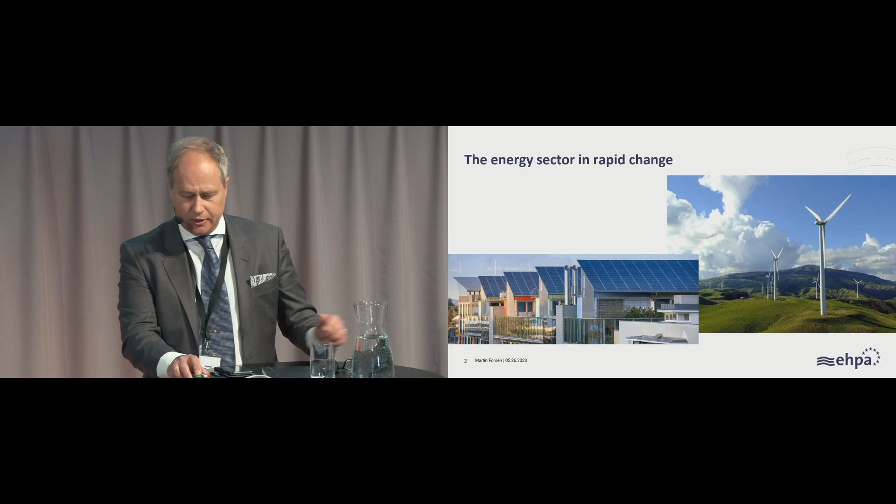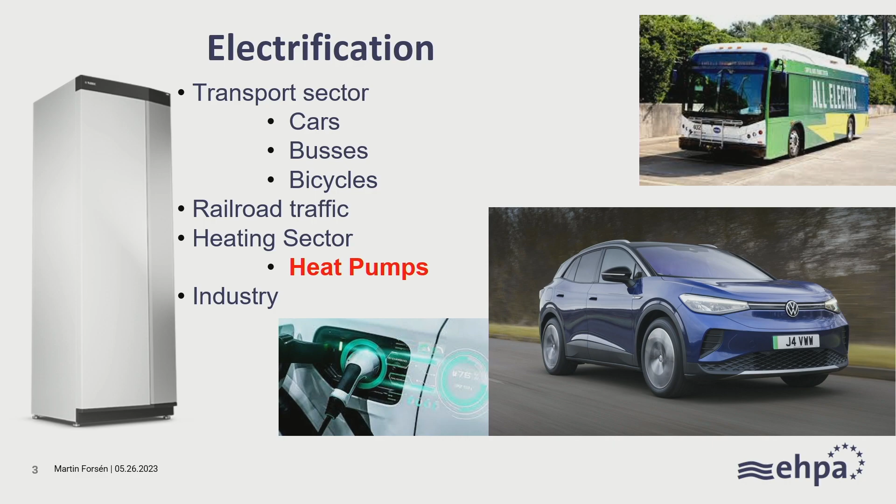And if we look specifically at what is at the center point here, it is electrification. What I believe is one of the greatest challenges for the future is to tackle large-scale industrial combustion, wherever it might be, because there is a problematic issue. First, we need to find a sustainable fuel to burn. There are lots of issues around that. Then we need to harvest that fuel somehow. We have to transport it, refine it, and then burn it, and it creates emissions. And then we have to take care of the ashes. There are great challenges all over that value chain.

But the way out of this is to electrify as much as possible. And we see this electrification has started. It's happening in all sectors - you know it in the transport sector, the increase in sales of electric vehicles, cars, buses, bicycles, you name it, railroad traffic, and in the heating sector.

That is central. And I told my colleague last night at dinner, I was almost crying when I saw the energy system integration strategy when it came out, where for the very first time it was highlighted the importance to electrify the heating sector. And that really paved the way for the upcoming new proposals for new directives and regulations. That was really key for us.

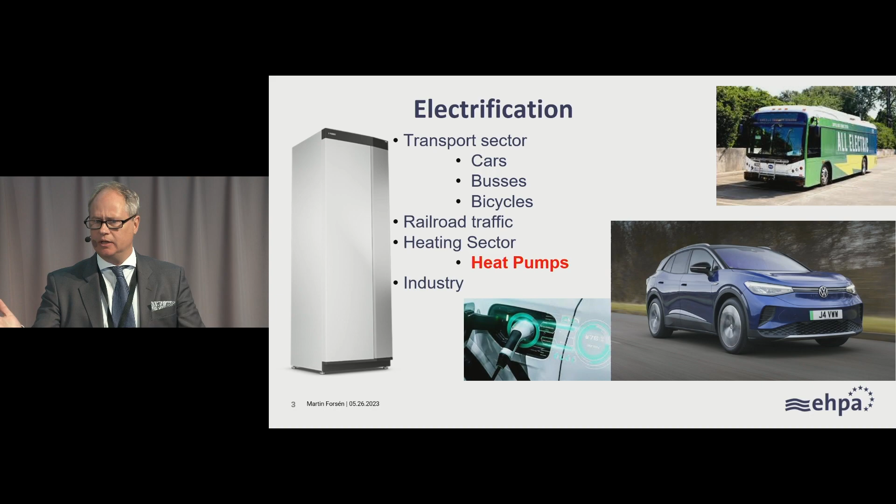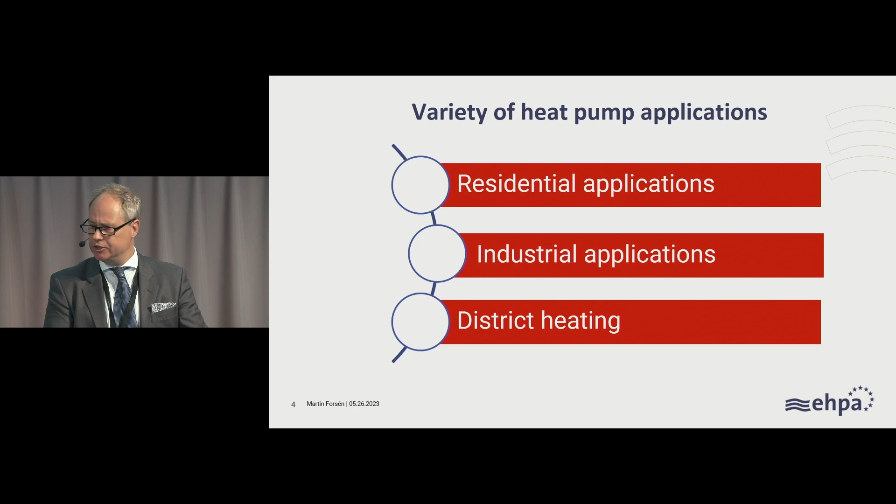Now we're on track. But why then, and where are we using heat pumps? Well, we're using heat pumps in all different types of applications. Today, we will mainly focus on residential applications. However, we also see heat pumps coming up, slowly but steadily, in industrial applications, and we believe it has a great place to fit into the coming generations of district heating as well.

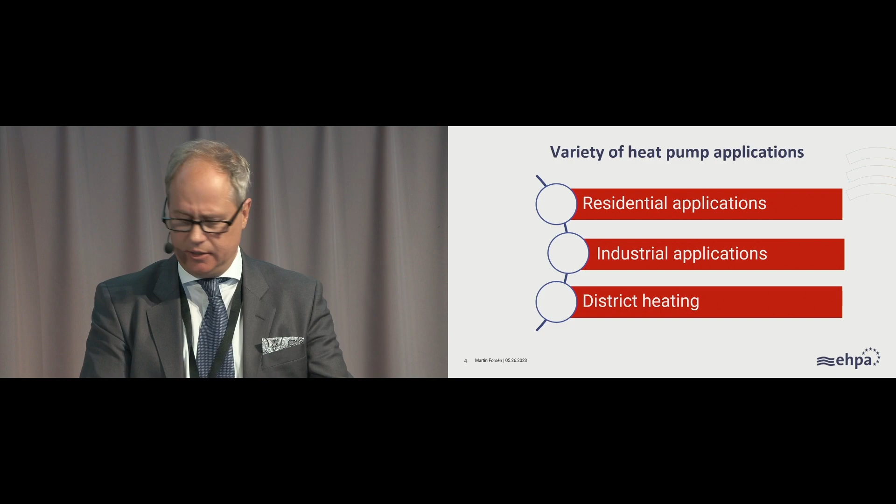But not only that, we have heat pumps all over society. I sometimes talk about the heat pumpification of society. We have hidden heat pumps in all our appliances to meet the demand for improved energy efficiency. New appliances like laundry dryers have a heat pump integrated. We see them coming in dishwashers. And pretty much every new electric car has a heat pump included in it.

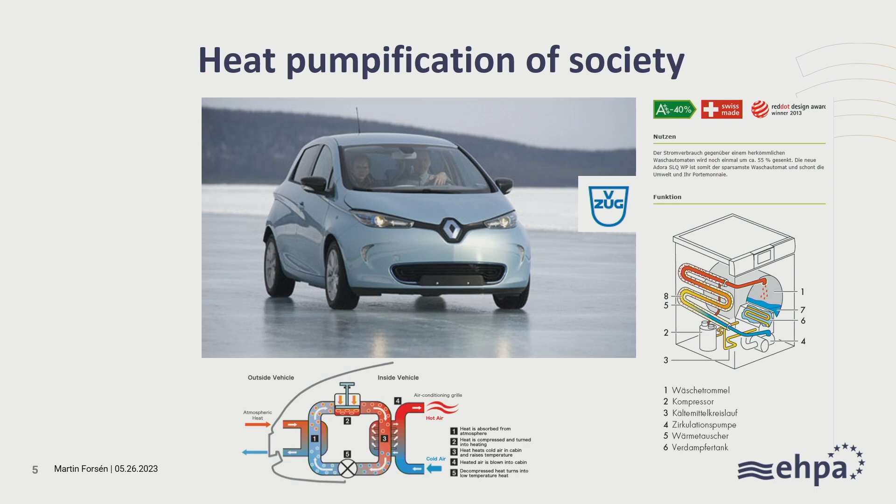I believe if it's not already the case, it will be very soon that the number of heat pumps installed as a component in another appliance or a vehicle will surpass the number of heat pumps being installed in buildings.

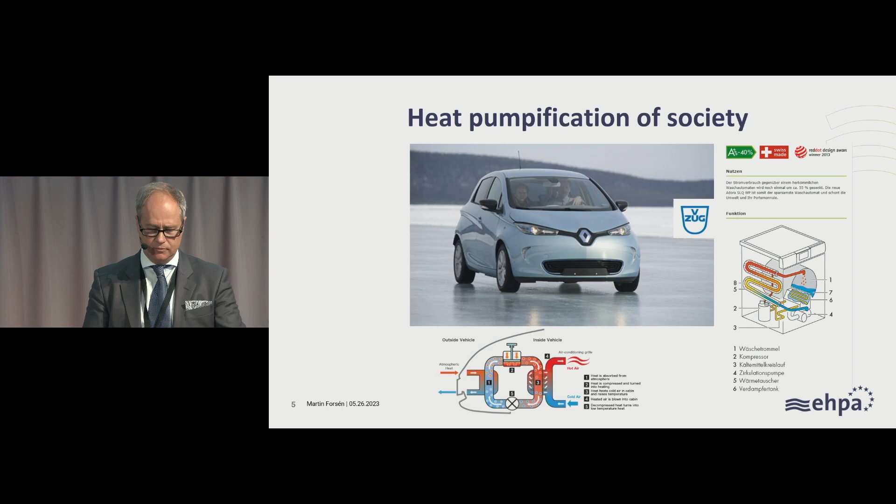So why are heat pumps so important for the future? Well, heat pumps stand for energy efficiency. It's one of the most efficient technologies that we have. It stands for emission reductions and also contributes to the increased use of renewable energy. We can also, in one and the same appliance, provide both heating and cooling. So that's really the backbone of what the technology stands for.

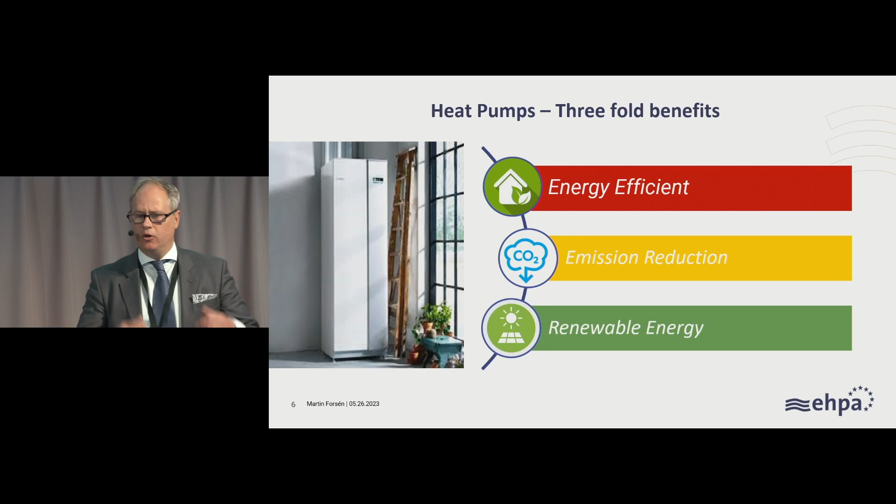And that has paved the way for the tremendous implementation rate that we've seen in Sweden for decades. So this slide shows the sales development of residential heat pumps in Sweden.

It all started around or just before the millennium, and ever since then, it has increased dramatically. We are now a mature market.

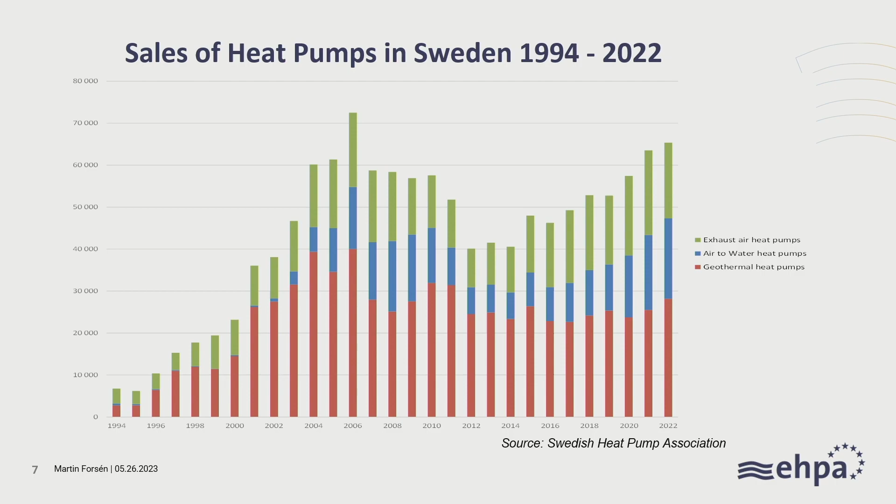This is the self-evident choice for people living in single-family houses, and it is growing interest also for multi-family buildings. It's growing interest in industries as well.

What you see here, we have also seen an increase in the last few years. That is not because the ones lagging behind are now introducing, going into this technology. There's some, but that's not the major part. Now, as we've had this steady market for so many years, we've entered into the replacement market of the old heat pumps as well. And that's why we see this increase in sales the last couple of years.

So it has been said earlier that now in Sweden, looking at the single-family houses, more than 60% of them have a heat pump installed and in use.

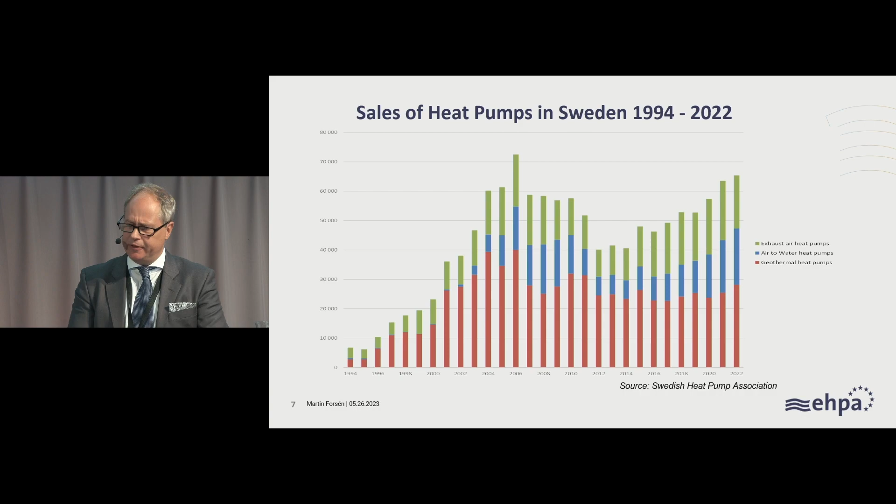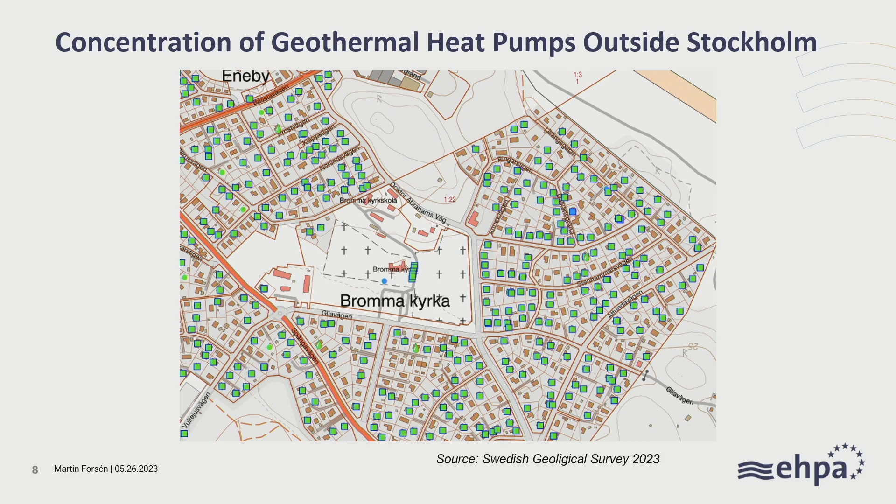So looking at this penetration, I've taken a picture from a suburb just outside of Stockholm, looking at an area here in Bromma, where we have a great number of ground source heat pumps installed. And it's not only in Bromma, that's not very specific. It's all over the big cities. We have these systems installed.

So what you see here is a map of this small area. The brownish figures here are the houses, and the green dots here are indicating which house has a ground source heat pump. So it's a tremendous, unsurpassed concentration of this very high efficient technology.

And those houses that do not have a ground source heat pump, the great majority of them are using another type of heat pump. There are hardly any oil boilers left.

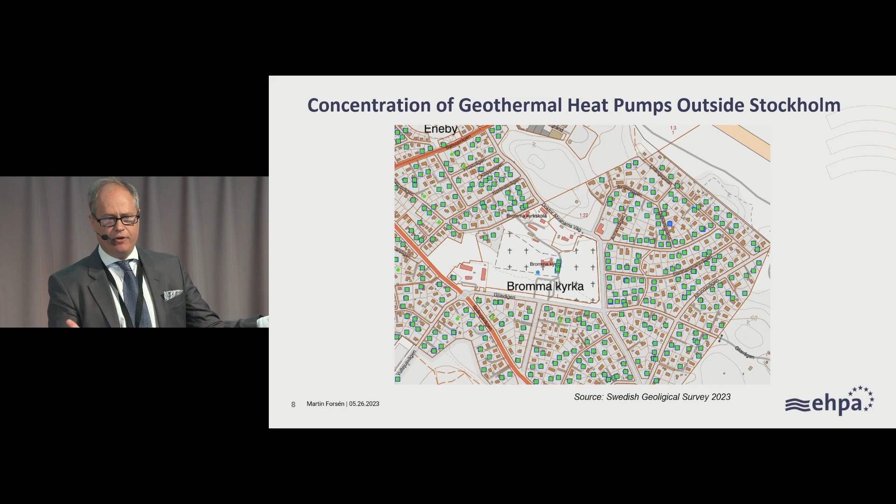So now we can answer a lot of these questions that all the other member states are raising. Does it really work? Does it really deliver? Do we live up to the promise? Now we can look at the results in facts and figures.

So looking specifically at the use of heating oil for heating purposes, as was said before by Eva, in the 70s, almost all houses were using heating oil. They had a boiler in their house. I had one myself. But that has completely changed now.

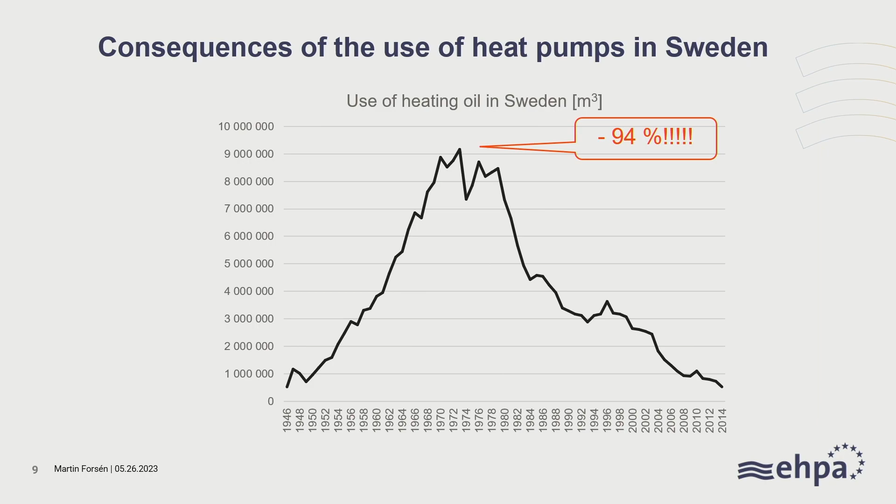There are hardly any oil boilers left. There are in the range of 10 to 20,000 left, and we know that many of those are not in use, but they're still remaining in the house. We're now down at levels right after the Second World War. So we believe that we've done that job.

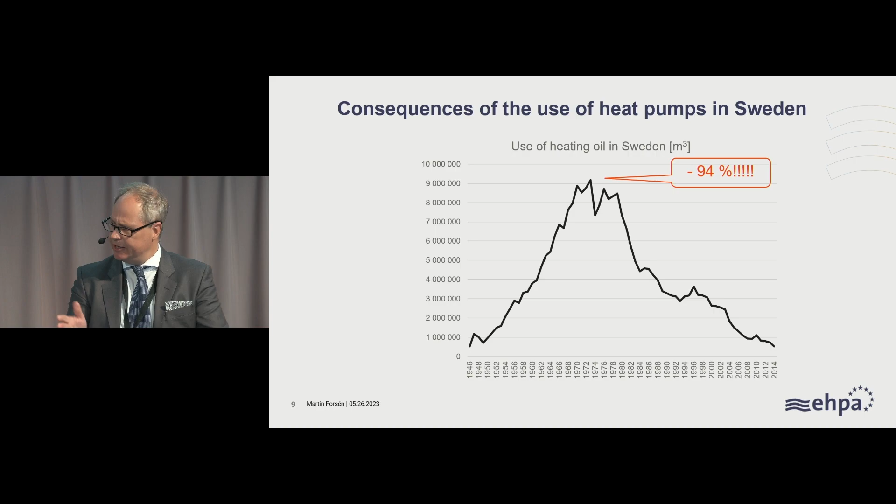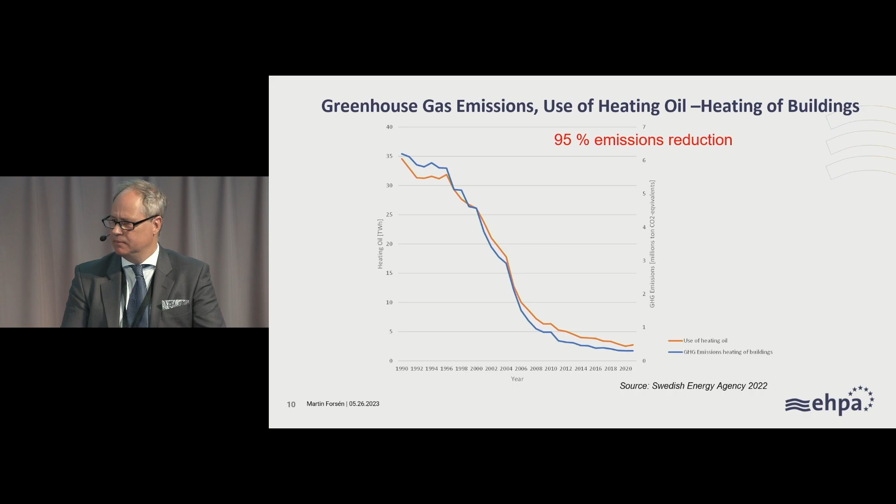We're past that. And what has come out of that, if we look at the emissions reductions from individual heating in buildings, it has been reduced now by 95%. So it really does deliver.

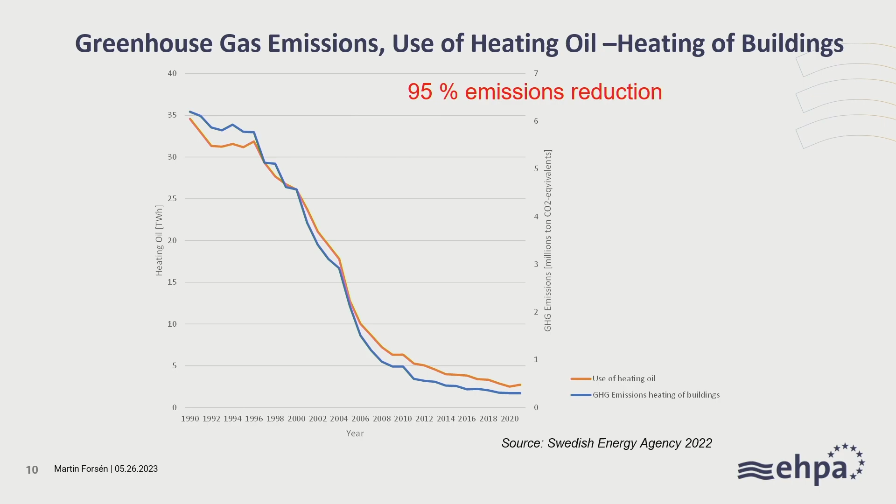But not only that, because we've had a surplus and a very strong electricity grid in Sweden, we've had in the past quite a lot of electricity heating. Not only direct electricity, but also electric boilers. So we did not only just shift out all the oil boilers, we have also replaced a lot of electric boilers, and we have complemented direct electricity heating by adding an additional heat pump in that house.

So not only have we reduced the emissions and completely got rid of the heating oil, but we've also managed to reduce the use of electricity for heating. So it really plays in very well.

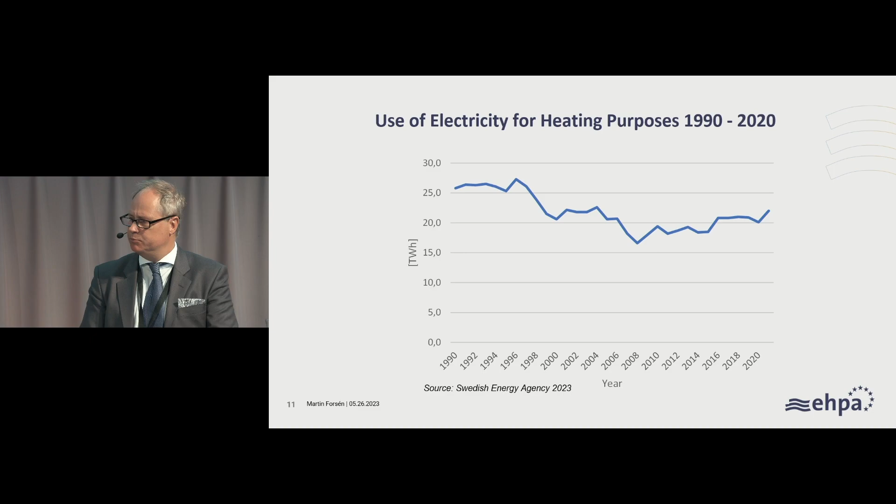So now, what are we going to do next? We're trying now to implement this technology all over Europe. We've already seen, as mentioned here earlier this morning, that many markets are picking up in Europe. So this is the sales trend that we see in Europe today. We've reached quite a high number, and it's really growing rapidly even further.

But what we need, as has also been mentioned, is more investments in order to be competitive. Can we ramp up production? This is crucial for us to keep the competition level high and maintain our good position here in Europe.

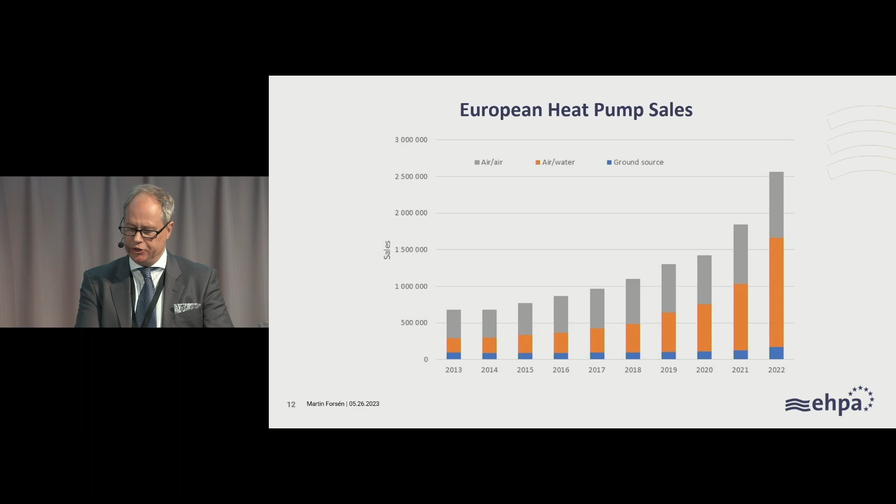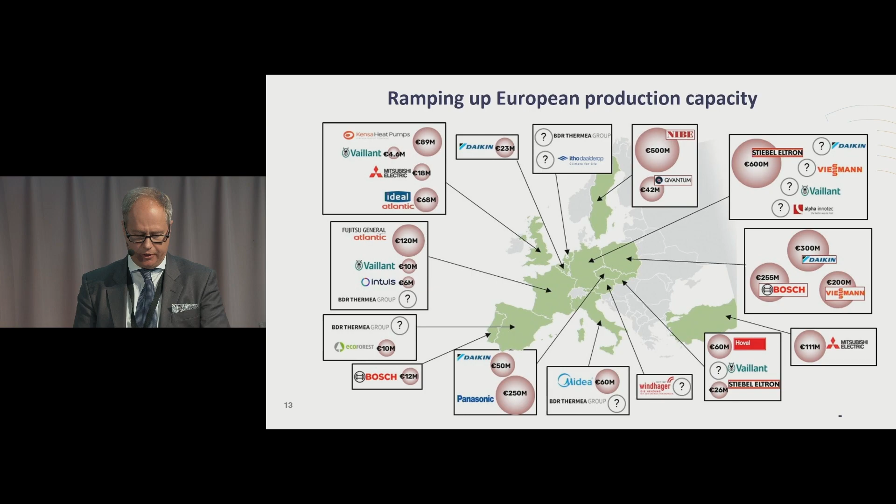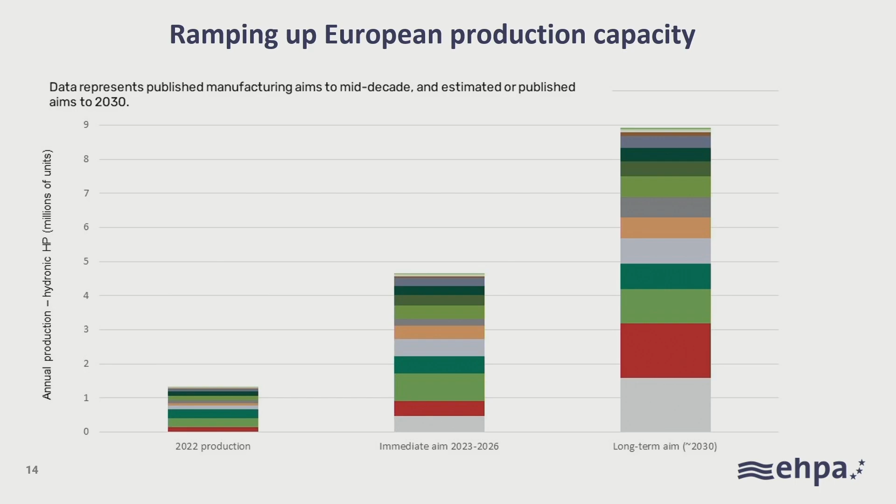And now, the heat pump industry all over Europe is investing heavily. We're building up factories in many different countries. So we are ready to take on this journey for all of Europe. We believe that by 2030, we will have the production capacity within Europe. We are standing strong and we're standing ready.

Now, just don't forget that only during the course of my 12-minute speech here, there has been an additional 120 fossil boilers installed in Europe. For how long can we let this go on? For how long can we afford that? We need to come to a stop to that.

And with that, I thank you for your attention.